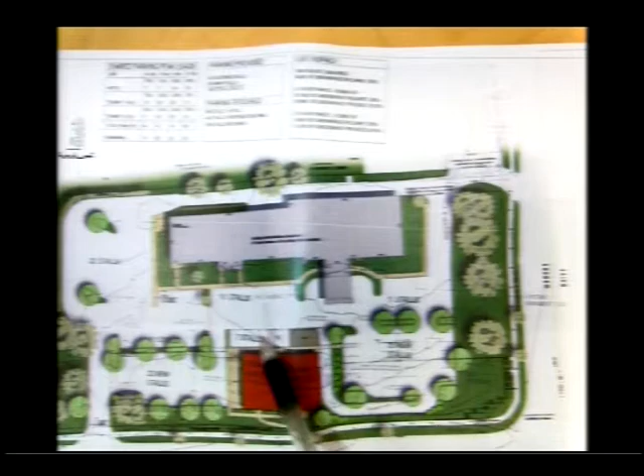The fourth comment was about the pitch of the roof. We talked last time about how the last pitch we presented made the building look really tall and out of place. So we went back and looked at a 6/12 pitch for the roof, and feel that it fits in and seems more in place than what we had previously proposed. So those are the 4 changes I had on my list.

Brad also brought some samples of building materials to show everybody what actual materials we're looking at using, so I'll let him show those as well.

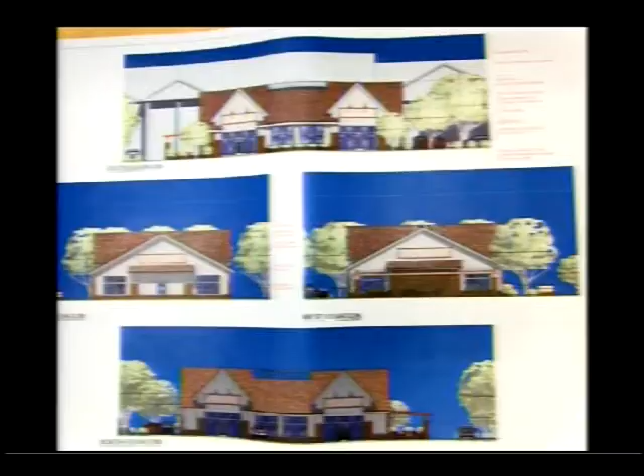As a recap, it's a cultured stone that will be applied to the building itself. We changed the color a little bit to more of a beige, beige ranges and tans. We also had a little more of a grayer sample of cement board siding, so we evened that out a bit so those work well together. There was also a question about the trash enclosure, and we're proposing split face block, a bit more durable material for that. We were looking at wheat, most likely, in split face, so it has the same color as the building and the same kind of texture, but would be less susceptible to the damage and abuse a trash enclosure goes through daily. That would be near the entrance there.

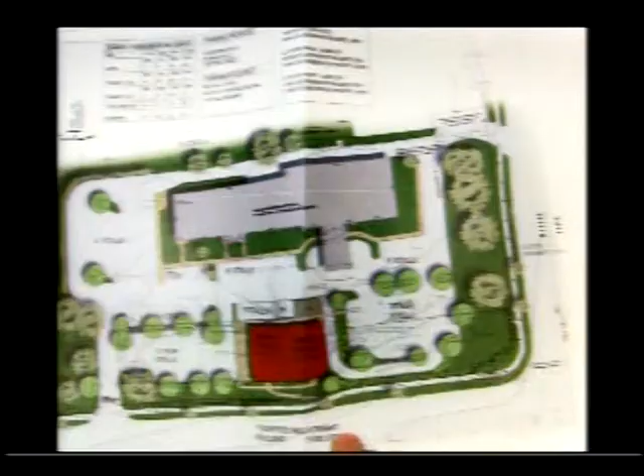The one other thing I just wanted to mention, going through Darren Pope's comments on the site plan, was the drive. I reached out to Darren and didn't hear back today, but wanted to just make a comment on the drive here.

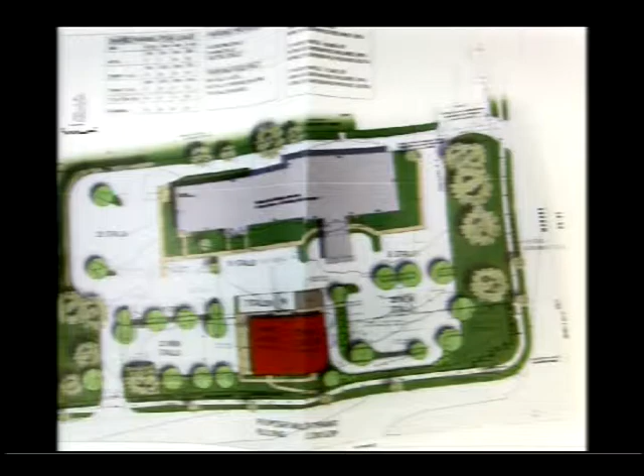Right now, we're currently showing a 20-foot drive aisle. I think the ordinance for Monona is a standard 24-foot. We've narrowed it without adjacent parking or parking that backs up to it. In different municipalities, we've gone down to a 20-foot aisle, and we would request or ask what the option or method is of getting that reduced to 20 feet in this case. Because we don't have cars backing out, we feel, and we've done this in the past, that a 20-foot aisle is enough space for 2 cars to pass each other with no cars backing out or anything like that.

I'm sorry, where are you talking about? It's this short piece of aisle right through here that's narrowed down to 20 feet. The reason we did that was so we could get another 2 stalls in to keep our parking counts up. If we moved to a 24-foot wide aisle there, either that tree island would have to be relocated, or we would potentially lose 2 parking spaces. So that was the intent of that 20-foot aisle. I guess that's up for discussion if the Plan Commission has any feeling about it.

Other than that, I think all the conditions and all the comments that Darren had, we'll be able to achieve.

Is there anyone else that wishes to say anything during the public hearing? Seeing none, we'll close the public hearing and move on to 5B, which is consideration of action on the request.

This is the 3rd public hearing and Plan Commission review of this proposal. Just reviewing some of the changes in architecture: the pitch was revised, and the 9/12 pitch was included in your plans as well, but the 6/12 is the proposed pitch. The east elevation was also revised with changes to the location and amount of masonry as requested by the Plan Commission. I also have a note to make sure that the trash enclosure is acceptable for materials and screening. There's some landscaping along the south side of it.

Yeah, it's just really calling out, the comment there is that the light fixture is bronze, it refers to the fixture in the schedule, but they're not bronze, they're green right now. The existing ones are green. The new ones, we can't find the matching pole, but it's not a shoebox, they're all gonna be the shepherd hooks.

Because in your schedule, it shows two different types too. Right, there's a single and a double. Well, there's also some other things. There's a couple of the holophane or whatever, and those I get, but what's the RAB lighting? I couldn't tell what that is. The RAB lighting is the building, those are the ones on the building. Okay, great, thank you.

And then if we can't find the green, Sonia had made a recommendation, if we can't match that, black is what's on Broadway. I don't know how you feel about that, but if we could go black on Broadway and green on the site and then introduce bronze, I don't know, it's just something everybody else can talk about. It would seem like at least we're matching from Broadway in, and then American Inn did something different. Well, American is actually switching over because they cannot find, there's no manufacturer stamp or anything on those existing light poles, and they're having a hard time because they want to switch over to LEDs as well.

So eventually, what I see happening is that American will switch over to these light poles. Yeah, I think we definitely could go black to match the street. And then as American transitions into their LEDs, they can replace to match.

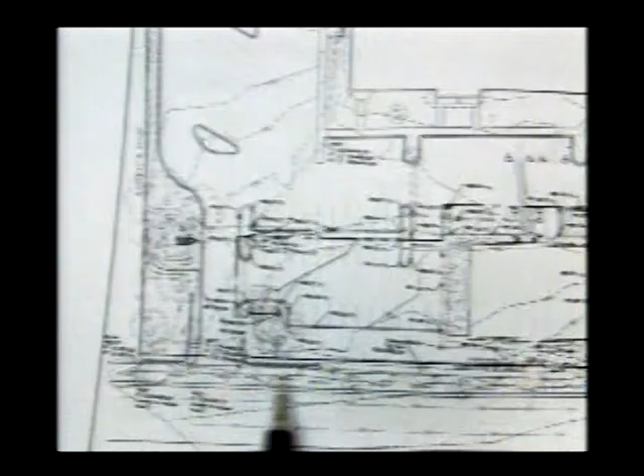There's an inlet here and an inlet here. I know this site drains into this inlet, but I'm wondering if the storm sewer continues here, because if it did, it'd be an easy fix. Instead of running your pipe here and back, you could just run down into here with a bio bed and then right out to that storm sewer, and it would be pretty simple. And you might even find better soils there.

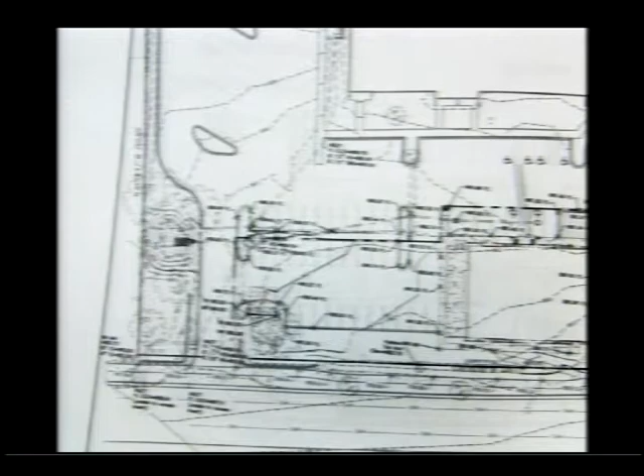Okay, but I think I'll check with Roxanne on all of us. I know Roxanne did look, we had a discussion about putting it in that area. I think part of her issue was the grades, because we're up another 4 feet there and we're sloping back down. At least you don't have all these trees you're cutting down in front of it. You look at the bio bed on other plan sheets, it doesn't look that big, like it's really getting at those trees.

But when you look at your grading limits, it's right up to the trunks of 3 of those, and you're taking all the surface feeders out of all those trees, and I think you could seriously affect the ability of those trees. We can take a look at that and see.

And I know I'm preaching to the choir, this is your front door, and you want it to go well, so I'm preaching to the choir, but it's something that I noticed that I'm a little concerned about.

Yeah, we'll definitely talk to her about it.

While we're talking about trees, I'm wondering if we slid that over one more. I don't know where it comes in the field compared to the canopies. You like to stay out of those canopies as much as you can, and you're coming in with that dumpster a little bit.

Is that going to have a frost wall or a floating slab? It'll be a floating slab, that's better. We were worried about trying to do a frost wall. Trying to narrow that up as much as possible.

I'd say keep it away from there, and maybe depending on where those trunks are - there's two trees there, you're getting really close to that one again too. Maybe we can angle that a little bit, or it might just pop out once it's one stall. But I'd sure like to see if it'd be possible to come down here and just not disturb that area at all. Okay, we'll look at that.

You could check with Bruce too and see what he found on those trees. I guess this one's pretty rough shape, that one's got some dieback, that one looks really good. But there's not much pervious area left for those poor trees. Okay, I'll look at it. Thank you.

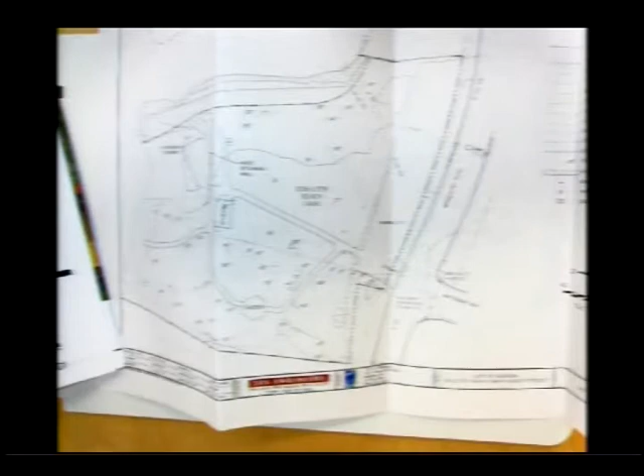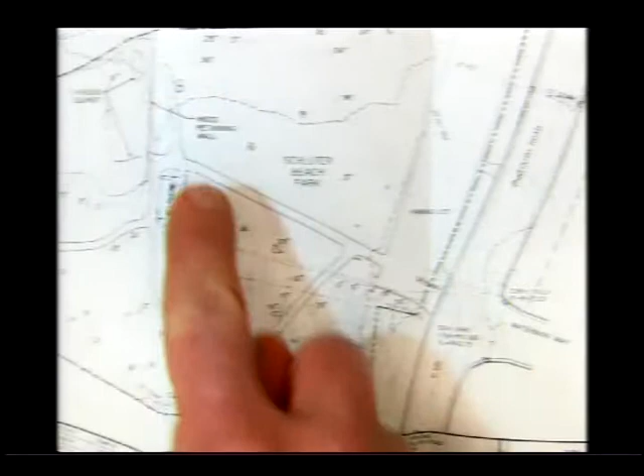So this is basically what we have right now in the park. We've got a parking lot here, and pedestrian paths that link up to the gazebo and to the existing restroom. The path goes out, fronts the beach, and then this path goes to our accessible fishing pier.

What we're proposing on the new site plan is to put the building perpendicular to where the existing restroom is, noted in the blue dotted line. The goal of the Park and Rec Board was to maintain the view from Winnequah Road to the lake as much as possible, and to keep the footprint of the new restroom comparable to the old one.

The building itself is as close to an exact replica of the bathrooms at Oneida Park that were constructed this year. There's also additional widening of the path system, and we're bringing a new path from the parking lot across the street to a curb cut at the Monona Bait and Ice Cream Shop.

That'll give access for both pedestrians and bicyclists using the Lake Monona bike loop. This portion here is going to be our bike repair area. A big part of this project is to make the park bicycle friendly and attract people using the bike route to our facility. There'll be a bike rack here, a bike repair station, a water bottle filling station, and bike rack parking, with potential for future expansion to maybe a B-cycle system.

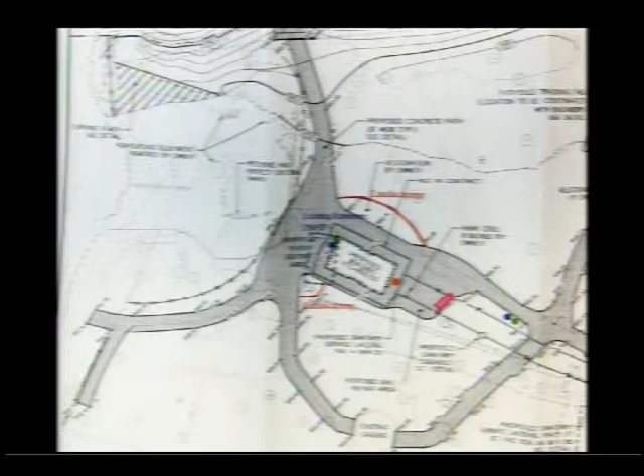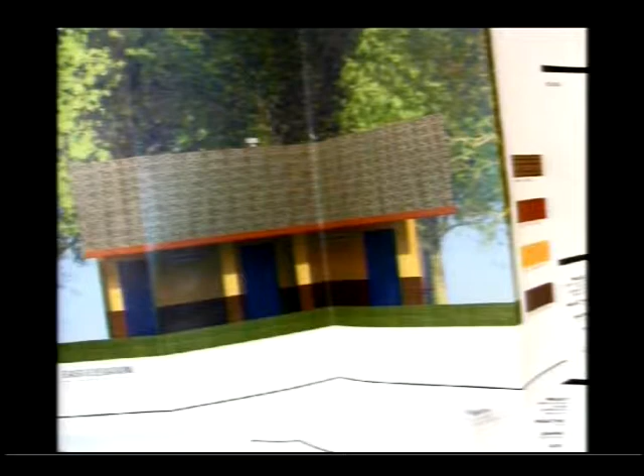This would be the front of the building itself. We have a men's restroom and women's restroom, and in the middle a changing room. One thing that came out of the Park and Recreation Board was to have an area for families who want to change for swimming, since people still swim at Schluter Park and the beach. The utility room is right behind there on the other side of the building. We have Diana Dorschner here, our architect from Dorschner Architects, who can answer any architectural questions.

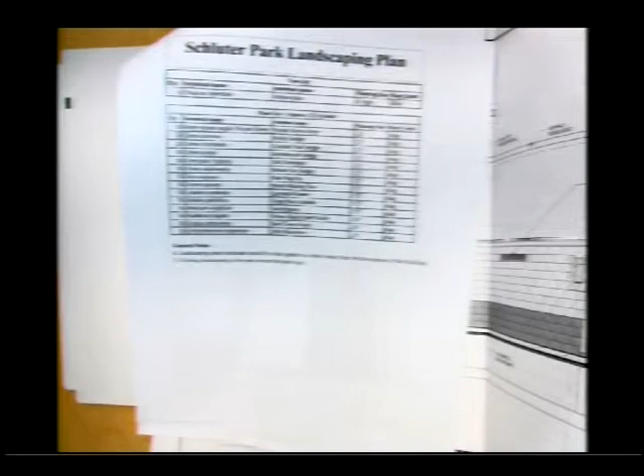I think that's about it, other than the landscaping. We've been through two rounds at the Facilities Committee meeting with a lot of discussion on how we're going to manage the water coming off the roof. Because we have concrete paths and the site topography is very flat, it's been a challenge to get the water underneath the concrete slab. What we're looking at is trench drains that go into a rain garden on either side, using a planting plan similar to the rain garden mix at the Lottes Park Improvement Project.

Jake, what was the other one—the LED lights? There was a recommendation to switch from the cool blue to a warmer tone, and also something to put over it so it doesn't end up too harsh. The LEDs can be pretty harsh. Sure.

So we're looking at using the same style of fixtures that we have. In your packet is actually a different style, so at the next meeting we'll have the updated specs on the light, using more of a neutral tone. There's also a dimming option we're looking at having that dims it to a certain percentage at a certain time of night, and then goes up to a full percentage, but it would have a dimming function to it.

I think that's about all I have right now. Anybody else wish to comment during the public hearing portion?

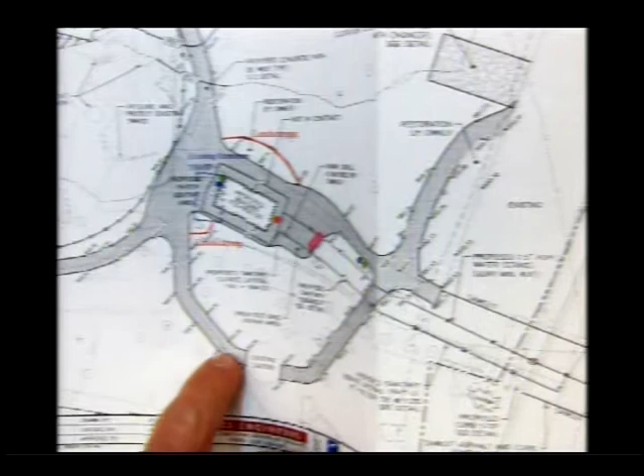We have worked here, for instance, on this path - it shows kind of going through that tree, so that path will be narrowed at that point. This part of the park with the mature trees, especially the oaks, is of extreme value to us, the city, and the Park and Recreation Board, and every effort will be made to save those trees and protect them during construction. Thank you.

I would say it's predominantly for fishing, that was what I was told. Canoe and kayak in the summer, we can launch right from the beach area there, but it's predominantly for fishing and having more of a designated spot. That's why originally we had kind of one over here too, realizing that's typically where I see most of the people fishing from, but they also go in here.

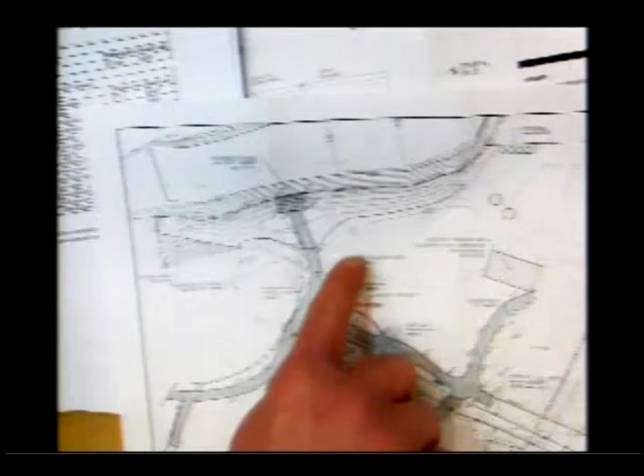I think we'd want to have the engineer take a look at it. I agree—we've got the 3 cottonwoods right here that were the ones wanted to be saved; the rest of the trees along the shoreline will be removed. So there's probably enough room to bring that back if that's the wish. We do have to make it ADA accessible, so we either keep it within this path system, adding a little cost to the overall project, or bring it up here with just one outlet.

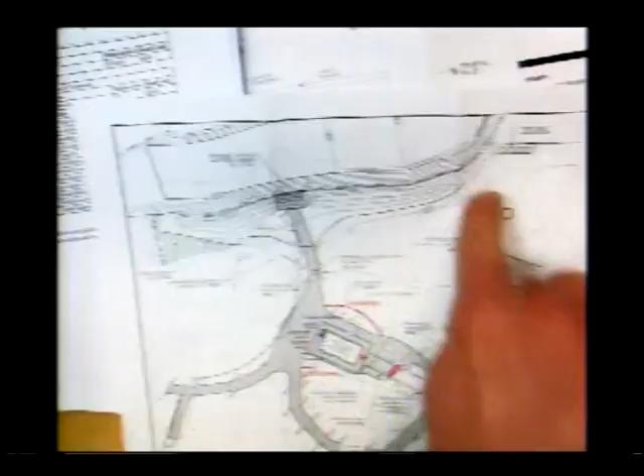Or maybe none—I'm not saying... I'm just saying if we go out there, it might be as simple as looking and saying, yeah, we could slide this 10 or 15 feet one way or another, so it wouldn't be as obtrusive to a neighbor, with very little or no cost. As far as a secondary access, that's going to add cost—you should talk to someone on council about that.

I'll bring a rubber mat to stand on. The Envirolock system you're talking about, I've used—it's really logs that have a growing medium in them, and some seeds, usually a low seed cover like a grass. Is there anything other than that, or are you just going to have these Envirolock logs? Because I can see people coming up and down wearing those out, and you'll start having erosion too.

I can include the detail—it's like a fence, well, not really a fence, but they're different than the logs. They stack up as they go, and they'd be filled with either compost and mulch, maybe mixed with a growing medium, and sometimes the seeds are right in there. It's basically like a super silt sock that's filled up, and the stuff starts growing out of it.

Sure. Now, that's not going to stop somebody from walking over there. Somebody can still walk right down that. You can wear that out eventually if they are going to do it. It'll give you nice stepping stones, because it's more of a Lincoln log type of thing coming out, but it's still going to be attractive.

So I guess if it's going to be attractive, is it possible, if we have that step system, that somewhere along the line you just step it with stone or something just for one area and try to, with planting, keep them directed into there? I don't know, I'm not a fisherman, but the people that do that might want to think about it. Maybe the Parks Board could talk about it a little bit.

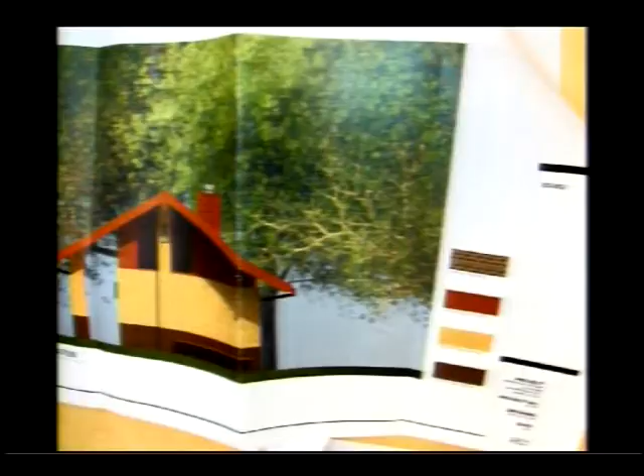They asked about lighting a little bit - could you just go over the plans? Sure. Is there lighting towards the beaches? I know there's lighting back towards the parking lot. We had, let's see, 4, 5, 6, 7, 8 lights on the building originally, so this one would be going out to the lake, and there'd be another on the column facing the parking lot. There's no plans in this project to do anything with the parking lot lighting - I believe there's a street light that illuminates a good portion of it.

You're not doing anything to the parking lot, are you? Correct, well, there will probably be some restoration from the construction work - just a simple mill and overlay of the damaged areas. During our facilities committee meeting it was recommended and approved that we remove 2 of the lights on the bathroom side, so just 2 instead of 4. Lights basically 1, 2, 3, 4 as you enter the bathrooms - the facility committee recommended we just have 2 there, but there'd be a light up on the column facing the parking lot, a light there, and then 2 lights on the back side. So there's fairly good security lighting around.

Question on your dimming - I know a lot of the C-stores and service stations we do have a dimming function like a motion sensor: it dims way down, and when people are around it lights up, and when nobody's around it dims back down. Instead of a timer dimmer, that might be a feature to look at, with a timer after a certain hour where you don't want it to get bright. It's a nice feature - you don't waste lighting until someone's actually around, and they stay active for a certain amount of time. I think that's what we're looking at, and I'd defer to Diana on that, but absolutely, occupancy sensor dimmer.